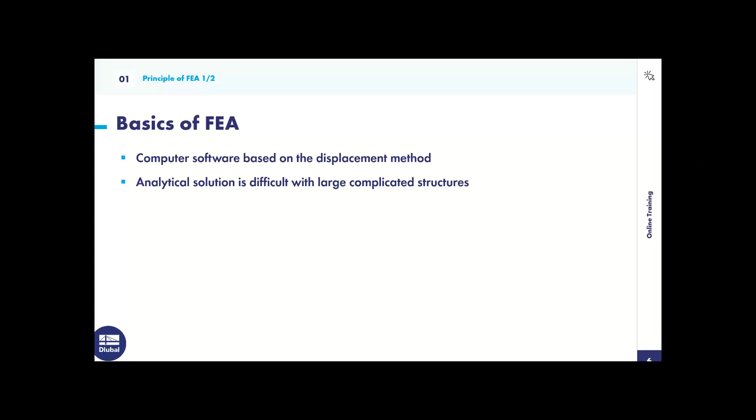So basically, an analytical solution is difficult with large, complicated structures. Doing hand calculations for large structures can almost be impossible and feel like a daunting task. The limits are being reached when it comes to that, and it's also hard to receive accurate results. So this is where an FEA comes in and is then required. The structure within an FEA is converted to a finite interconnected element mesh, and then the material and cross-section properties are given at each finite element node. Once that's done, the mechanical behavior is transferred between these elements. A word I'd like you to walk away with is discretization. This is where the structure is being submeshed into finite elements.

So now we can go through the FEA calculation workflow. First, the local element stiffness relations or properties are determined. Then the program changes the stiffness relation at each node to the global coordinate system. Then the entire structure is assembled. Fourth, the support conditions are implemented into the structure. Then the displacement vectors are determined. And lastly, the support forces and internal forces are determined.

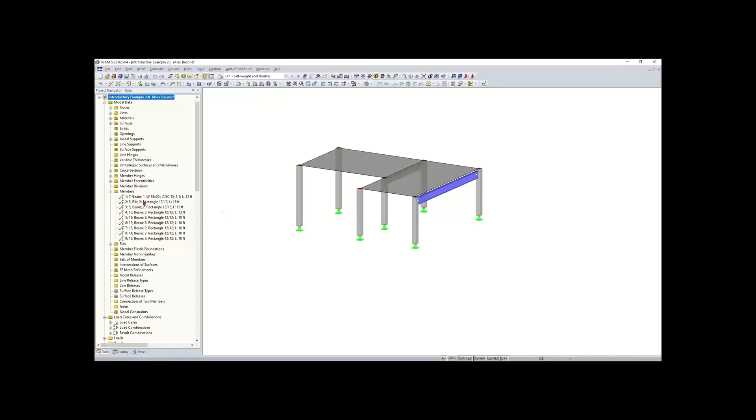For example, within this project navigator, you can expand and collapse all of these folders, such as members, and within these folders we have each member listed. This can also be done for nodes, lines, and materials, etc. And you can see when I click on any member within this expanded folder that this is synced up with your graphics window on the right-hand side here. So if you ever need to find anything, you can do it easily with that.

The next thing we have is our tables at the bottom, which mine are hidden right now. If you have either your project navigator or your tables hidden, you can show or hide those using these two buttons up here. So I can click and hide and show, and you can see that we have the tables down here. Within these tables, things can be created or deleted, and you can also just view your model information. The tables have tabs down here to organize all of your model data, as well as different tables for things like load combinations and results.

Next, if you want to change your background, you can do that by going up here to Options and Configuration Manager. So we can open that, and you can see that right now I have mine set to a standard white background, which I will use for this training. But you can also change it to a black background, and we also have a couple other options as well. After that, this is called the work window here. Within here you can draw lines, surfaces, etc. We'll be going over all of the finer details with that.

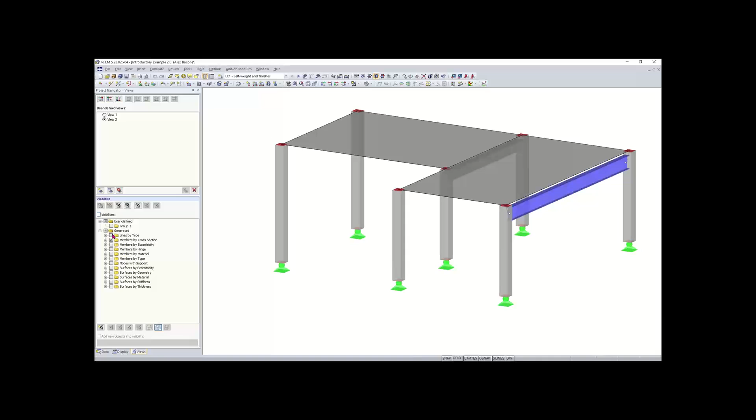The next thing, our last tab here we have is our views tab. So within our views tab, we can create visibilities based on these options down here. So if we turn on visibilities, we can create visibilities based on member cross sections. So right now, if I only wanted to show my W18x50 here, I could do that. Maybe I only want to show my rectangular columns here or rectangular cross sections, my 12 by 12s. We can do that as well. And then you can also save visibilities as well, and then pull them up whenever you'd like.

The third tab we would have is our results tab. So if I just run the results for this model quickly, then we will see our results tab, and that will pop up at the bottom here, only if we have results ran. So I just ran my load case 1, and if I turn off my visibilities, now you can see in my results tab, this is again similar to the other menus where we have our expanding and collapsing folders. So right now I have global deformations checked off, and we're viewing our resultant deformations. And you can see we get a nice look at that.

And then we can also check out our member basic internal forces, as well as our basic internal forces for our surfaces as well, if we would like. But we'll go over more of this in detail later, so don't feel too rushed to learn this real quick. We will be going over all of this in the training. But just want to give a basic overview.

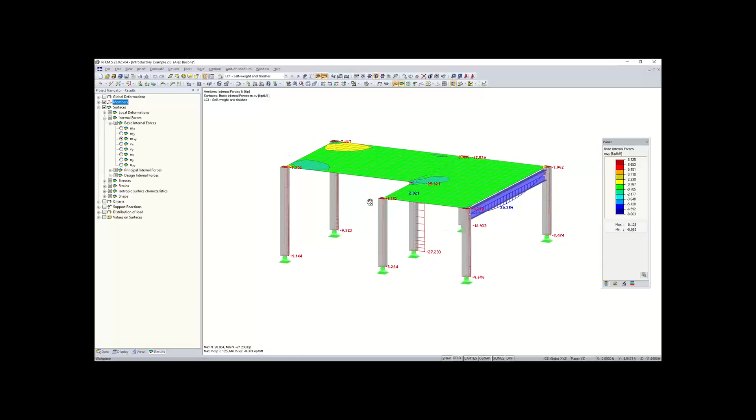Also, controls, very important. So if you like to interact with your model, if you have a scroll wheel on your mouse, you can zoom in and out with the scroll wheel. Clicking down the mouse scroll wheel will let you move the model in translation. And then holding Control and clicking down the scroll wheel at the same time will also allow you to rotate your model. If you don't have a scroll wheel on your mouse for some reason, you can use the arrow keys on your keyboard to move the model around in translation. You can also hold Control and use the arrow keys to rotate the model as well. And then if you want to zoom in and out with the keyboard, you can use the plus and minus buttons as well.

One more thing before we get into modeling, I would like to just go over highlighting. So real quick, if you highlight from right to left, this will give you a purple box, meaning that anything that touches this purple box will be highlighted and selected. Highlighting from left to right, only things that are fully engulfed into this red box will be selected. So that's the difference between the two highlighting boxes.

So now, before we go into it, I can go back to the PowerPoint. And I just have another question to ask before we get into the model. So the question is, what is RFEM? And then the options from A to C are listed. So if you could just answer that, and I will give you about 30 seconds to a minute. Oh yeah, I forgot to mention you can answer the question within the question box.

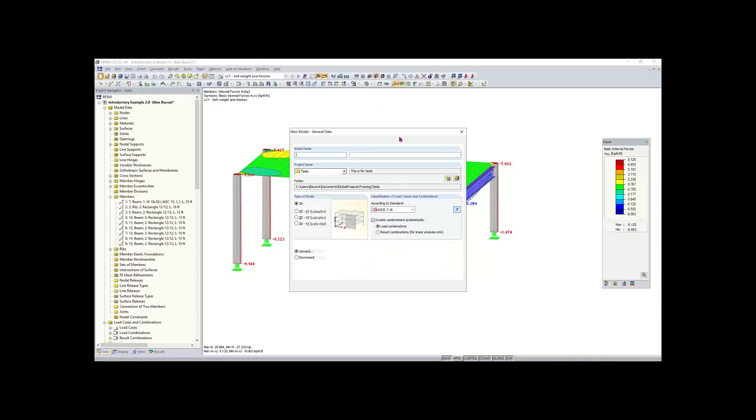Once you click that, you'll see that this new model general data dialog box will pop up. Within this box, we can enter the information needed to create our model. The model name, you can name anything you want, but I'll name mine continuous plate for this example. And I'll just put training. You can also add a description to your model if you would like.

The next thing is our project name here. We won't get into much detail with this right now, but if you have a project with a lot of models that go with it, you can create a project folder, and this will be a local folder on your computer where all the models you create will save automatically. It's a good way to stay organized. The next thing is the type of model, and right now we'll just leave this as a 3D model.

And then classification of load cases and combinations. This allows you to create load cases and combinations automatically if you have this box checked, based on any standard that we have listed here. You can see we have lots of international standards to pick from. I'll leave mine as ASCE 7-16 for this training. The next thing is the positive orientation of our global z-axis. We'll leave that as upward as default. And you always want to make sure that the local z-axis is set to downward.

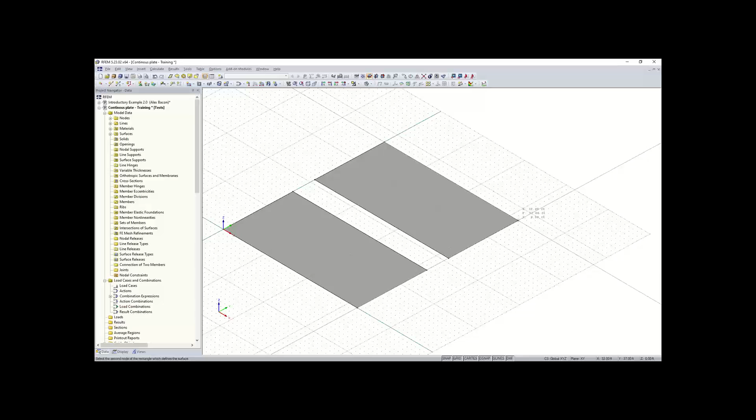And now we can create the same plate again above this original plate. I can just go up here to my rectangular surface tool again. I can click OK. And now I'm going to model a second plate 5 feet above this one. And then I can click and just drag my cursor. Make sure that this is 16 feet wide. So that will be right there. So now we have our two plates here modeled within the XY plane. We'll go over work planes later in the training.

So then we can simply create a third plate pretty easily. And to do this, we can use our move and copy tool. So I can rotate here, simply highlight the second plate, right click on it, and click move/copy. What this will allow me to do is make a copy of this plate and then move it wherever I would like using displacement vectors here. What I'm going to do is use this select 2 points option, and this will give me a displacement vector by selecting the 2 points graphically.

So now I can just simply create one copy of this plate, and then I can create a displacement vector graphically. I'll select my bottom corner here, and I would like this copy to be 5 feet above this plate. So I'll click that, and I'll click OK. And now you can see that the copy was made, and it was made based on that displacement vector that I selected.

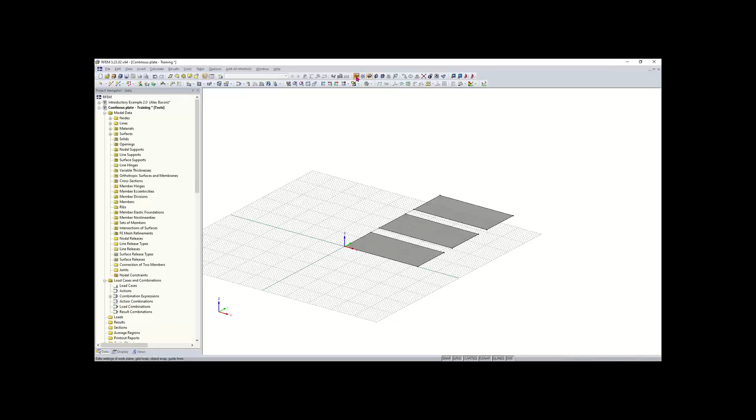And now you see we have a dialog box with a lot of options for our work plane and grid settings. The one thing we're going to focus on is the number of grid points. You can see we have a graphic here giving you an idea of what these values represent for plus and minus and 1 and 2. We have 50 grid points in our negative x, positive x, negative y and positive y directions. So you can either just change these numbers and expand your grid manually, or another good option is to check off dynamically according to size of model. When you check that off, you can click OK. And now you can see that the grid changes depending on what you modeled, which is pretty useful.

So now we want to model our continuous beam. To do that, we can simply go up here to our tool called New Single Member, and we'll click on that. Once we click on that, we have our new member dialog box here. There's a lot of information, but the one thing to focus on is to input what our cross-section is going to look like. So we can go over here to this button called Import from Cross-Section Library. We'll click on that.

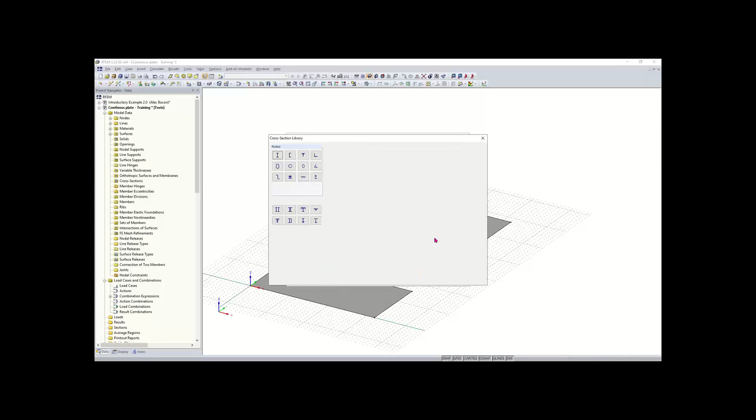This is similar to the material library, but you can see that we have our cross-sections here. We have rolled, built-up cross-sections, parametric thin-walled, parametric massive, and parametric timber cross-sections, as well as some other options down here. Right now we'll just be focusing on our rolled I-sections here.

Actually, my mistake. We will not be using the rolled I-sections. We're going to be using the rectangular parametric massive sections right here. So we'll click on that.

Once I click on that, you can see that I can enter the parameters for my cross-section, like the dimensions. So I can enter what the base is going to be, which is 40 inches, and my height is going to be 12 inches. Now you can also see down here that our material is by default set to 4,000 psi concrete.

So it's also per the older ACI standard. What I can do is click on edit, and then I can go and change it to the newest standard, change it to 4,000 psi concrete, and everything is correct there. So we'll click OK, we'll click OK again.

Now you can see that we imported that cross section. You can see it's represented here on the right hand side. So everything is good there. We can click OK.

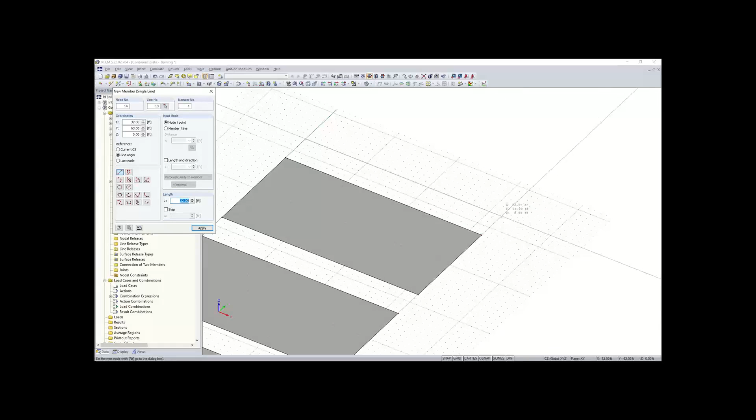So I'll left click again, and now you can see that our beam has been drawn. And now we have our 3 plates in our continuous beam right here.

So the next thing we want to do is we want to divide these lines here on the edge of our plates, so we can add a midspan here for supports. We also want to divide this continuous beam, so we can add a middle support as well.

So to divide the lines, we can simply just right-click on the line. Again, when you right-click anywhere or on any object, you get this shortcuts menu. So we can just right-click on this line to divide it, and then we want to go up here to divide line. You can see under divide line, we have multiple options for dividing a line.

So we can do it by distance. And you can see when I pick that divide line option, we have these gray arrows here on your lines, and these arrows tell you the orientation of the line or the direction that you drew the line. So this would be the start, and this would be the end of the line. You can also view these arrows by just hovering over any line that you've drawn.

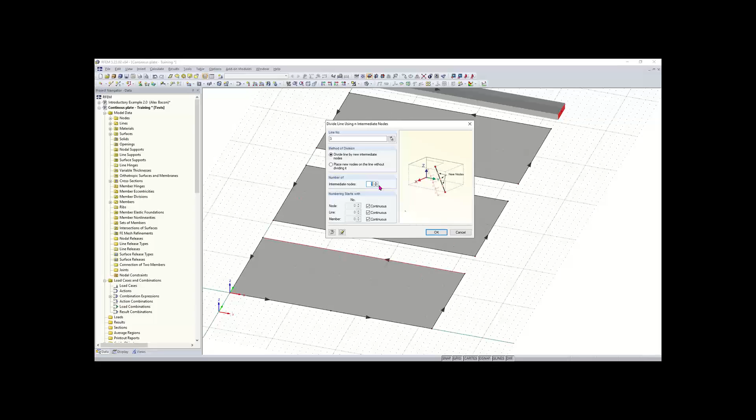So maybe you want to divide your line by intermediate nodes, which just means you can tell the program how many nodes you want to place on the line, and it'll divide that line equally depending on those nodes. So I just want to place one node. I'll click OK, and now you can see that that one node is placed and equally spaced.

So now we can do this for the rest of the lines, and we can easily just hold Control, and we can just select the rest of these lines here. Right click. Holding Control and clicking on or selecting options will allow you to select multiple options. Then we can just do this by intermediate nodes again. Everything's set here, you can see the multiple lines have been selected. I'll click OK, and now we have these nodes placed in the middle of our lines here.

Now we would just like to divide our continuous beam up here, and I can just right click. It's similar to the lines. I can just right click on the beam, go to divide member, and the third option would be graphically. So graphically just allows you to select graphically where you'd like to place the node. I'm going to place it right in the middle here at 16. And now you can see that our member here has been divided.

I'll rotate the model to get a better view. Now that our members and lines have been divided, we can draw a line down the middle of our plates. The reason we're putting this line down is to later add a line support there, so we have some mid-span support.

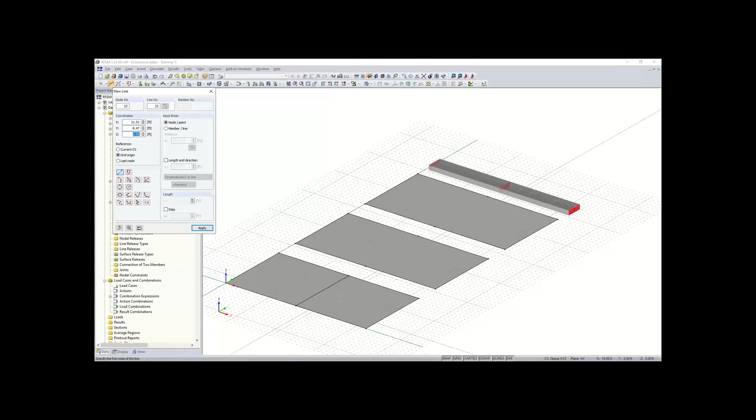We have an option called New Line, right next to the New Single Member button. I'll click that, and this box opens up where we can draw our line within the work plane. I'll select snap to, select the first node, then draw it and snap to the second node. You can see a perpendicular symbol letting me know the line is perpendicular. I can right click or hit escape to exit the tool, and now our line is drawn.

Now that this line has been placed, instead of redrawing it, we can simply click on it and hold Control. If I click on something, hold Control, and drag it, that makes a copy of it. This is a great workflow for working with anything in RFEM. You can highlight something, hold Control, make a copy, and drag it and snap it anywhere. It's pretty efficient.

Now we can add in the nodal and line supports. First we'll add line supports for our plates. To do that, we go up to New Line Support. This line support will have certain conditions, so we click the button called Create New Line Support.

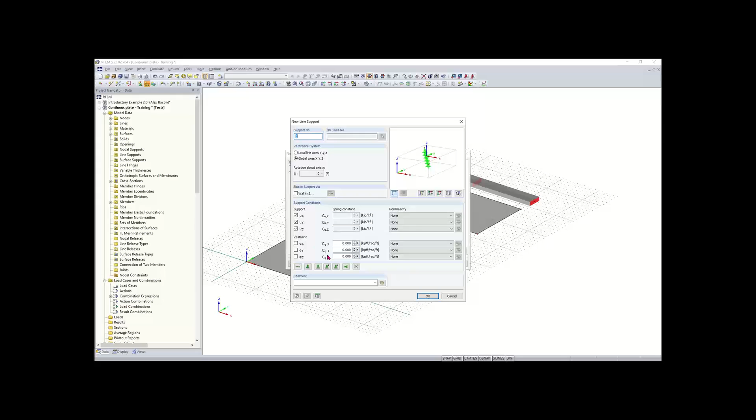We have our support conditions here. The first section is for fixing conditions in translation, or you can fix your degrees of freedom in rotation. For this example, we just want the rotation fully released, and that's all we need to do in this box. This will be a hinge support, so we click OK, then OK again.

Now I can simply click on my lines, and click on the outside to add supports to the ends. So we'll have two end supports and a mid-span support. Now our line supports have been added to our plates.

Now we just need to add nodal supports to our beam. We added line supports to our plates, now we want nodal supports. To do that, we go up to New Nodal Support. By default, hinged is already selected, so instead of creating a new type, we just hit OK. Now we can select our first end node, then select our middle support.

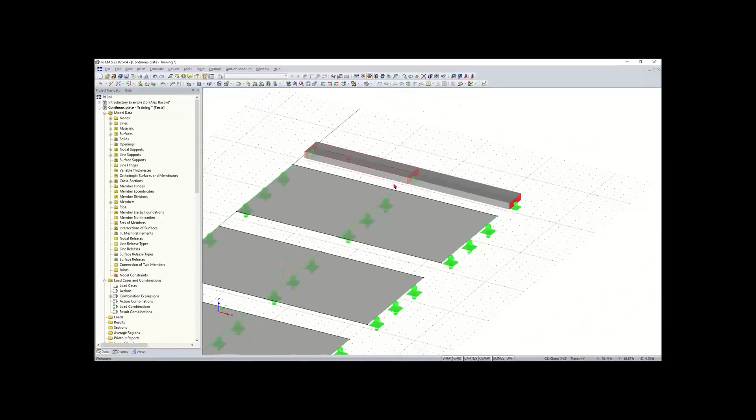This last end support will have different conditions than the other two. So we go up to nodal support and create a new type of support. This will be the same as a hinge support, but rotation about the local x-axis will be restrained. I'll click OK again, and now that support is a little different - it can't rotate about the x-axis, so it's locked. Now all of our supports are defined.

Now that our supports are defined, we can get into loading. We would like to load these plates in this continuous beam. It's important that we create a new load case, because every load in RFEM needs to be assigned to a load case. We can go to edit load cases and combinations, or use the New Load Case button, which I'll click.

The program has automatically created a new load case for me already. You can add a description here - for this one, I'll call it dead load. The action category is set to dead, but we don't need to worry about that right now. Here we have an option for activating or deactivating self-weight. For this example, I'm going to deactivate self-weight. Now our load case has been defined, and we can click OK.

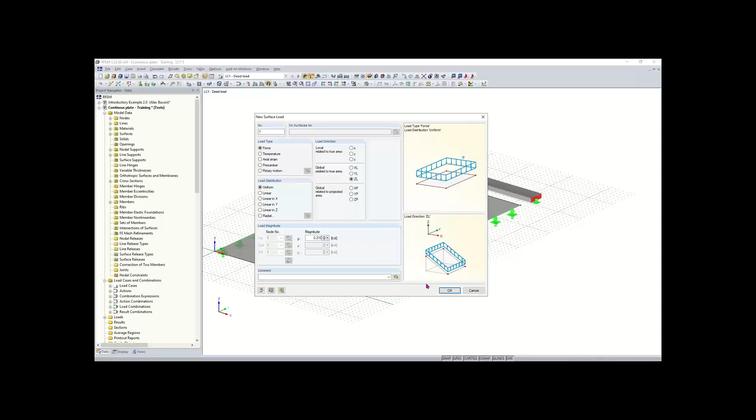Once I click OK, you can see that my cursor has changed here, allowing me to select surfaces within my model. Once I click on a surface, those loads are generated onto the surface. You can also notice that my loads are pointed up in the positive Z direction. I would like those to point down, so I can simply highlight them and double click on them, then add a negative sign in front of my magnitude. Once I click OK, you can see that the loads will be shifted, or swapped.

Next thing we want to do is add a uniform load to our continuous beam here. Again, up here with our tools, I want to choose a new member load. Keep in mind that the member load tool is for members only, and the new line load tool you want to use only for lines, when applying loads to the perimeters of surfaces, for example. So we'll choose new member load.

Again, this is similar to the surface load, where we will have a force as the load type, this load distribution will be uniform, and the load direction again will be in the global Z direction. I'm going to add in a magnitude of negative 0.21 kips per feet. I'll click OK, and now my cursor has changed, allowing me to select my two members. Now we can just right-click anywhere to exit out of that tool.

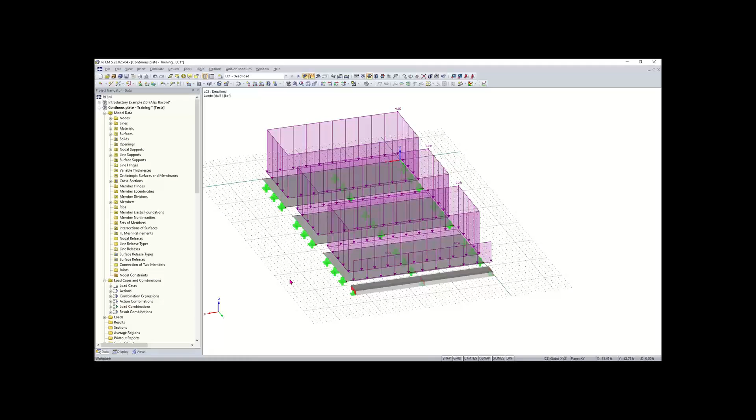Yeah, so if you've drawn your loads and you want to edit them, you can simply double click on them. Double clicking on just one will allow you to edit just that one load. Also, if you need to highlight all of your loads or a couple at a time, you can highlight them and then double click on them, and that will allow you to edit them.

Great, thanks. You're welcome.

Now that we have our loading, we can move on to creating FEM mesh refinements. Within the program, for surface elements an FEM mesh is generated, and right now our FEM mesh is set to about 1 foot for the length of our finite elements. We'll get into that more later if you're a little confused. For now, we'd just like to add an FEM mesh refinement, which allows us to change how fine our FEM mesh is for individual surfaces.

So to do this, I can simply just right-click on my surface here, go to FEM mesh refinement, and then click on New. And for this, I'm going to just create a new FEM mesh refinement here using this button called Create New FEM Mesh Refinement. You can see that surface 1 is selected, so I'll click on that.

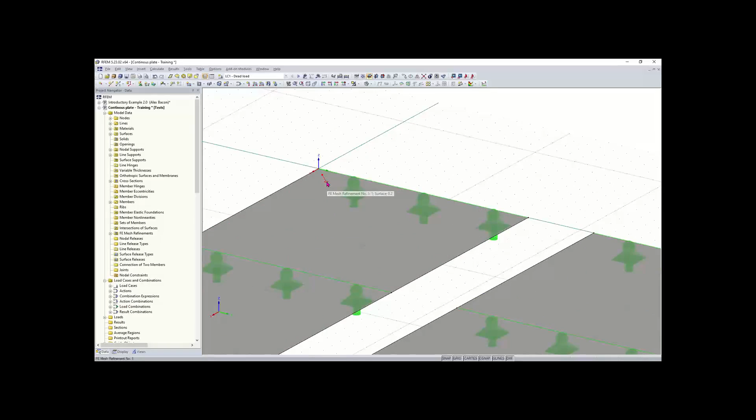And then right now we just have surface selected, which is automatically done by the program, and we can set our target FE mesh length. So I want to set mine to 0.2 feet. This is smaller than the 1 foot default that is already selected globally in the program, so I'll click OK. I'll click OK again. And now you can see that we have this little icon here telling us that an FE mesh has been applied.

Now we want to do that same thing for our other 2 surfaces here. Again, we can right click on this surface and add one, but we can also go into our project navigator here on the left hand side, and we can scroll down to FE mesh refinements. I can expand that and you can see we have one for surface 1. I can right click on FE mesh refinements and click on new FE mesh refinement.

And now I can just click on surface. It's wondering what surface I want to apply this to. I can type in the surface number, or I can select the surface graphically. I'll click OK. And for this surface, I just want to increase the FE mesh refinement just so we can get an idea and compare results later on to see how our results change depending on FE mesh length.

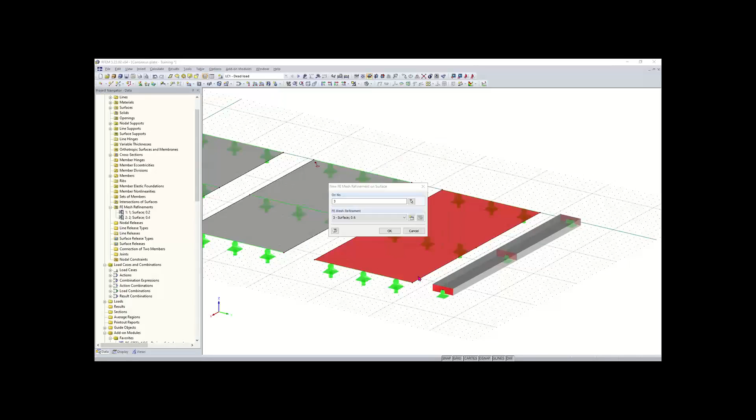So I'll click OK, and again we get that icon, and then I'm going to do the same thing for this third surface. So I'll just right click on it, and then I'll create a new FE mesh refinement, and then I'll just make this 0.6 feet. So you'll see that they'll be increasing down the line. I'll click OK again, and you can see that that icon has been placed there.

We have another quick question unrelated to the FE mesh, which maybe you can just address quickly. Okay. One of the attendees noticed that you selected concrete for one of the materials. They're wondering, what does the RF-CONCRETE add-on module do then? How is the add-on module different from RFEM is what you could quickly explain.

Okay, yeah, so basically the material for concrete has been selected within RFEM here, and you'll see later on when I run results that in RFEM you just get things like the global deformations, the internal forces, support reactions, etc. But if you want to design, let's say, rebar, you want to design your slab here for reinforcement, that's when RF-CONCRETE Members or RF-CONCRETE Surfaces would come in. So we have 2 different modules, one for surfaces and one for members. So basically the add-on module is for designing the reinforcement.

And I would just add to that, just like what Alex said, the analysis is completely within RFEM, and all materials are available to you there for full modeling for the analysis. And then, as he mentioned, the modules are for design. So within the RF-CONCRETE modules, you would find the various standards, such as the Eurocode, the ACI, the CSA standard, to actually do the reinforcement design, which is not done within RFEM. So I think that's good.

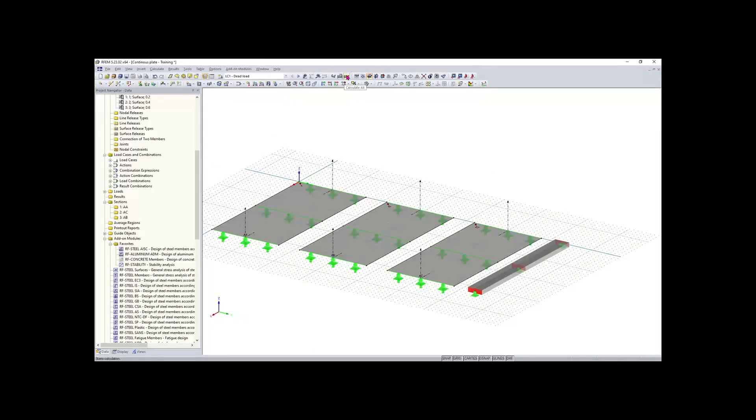So again, you can turn on and off the loading up here with this button. I don't have mine shown right now. I'll turn it off for now. And now we can go up here to our toolbar and click on this button called Calculate All. So once we hit Calculate All, the program will go through and run the calculations. It should only take about a minute. It all depends on the size of your model and the complexities.

And then once this runs, the first thing we should see is our global deformations. And then we can get an idea of our internal forces and things like support reactions. So now you can see that we have our global deformation shown right now. We get a panel over here on the right-hand side, and this panel is basically the legend for our colors here. And you can see that we have a max displacement of 0.022 inches.

And then we can also view the deformations on our member here. Right now, we just have that set to a yellow line. But if we wanted to have a colored cross-section for this deformation, we could go to Display, Results, Deformations, Members, and we could select cross-sections colored. So now we get a nice color section here.

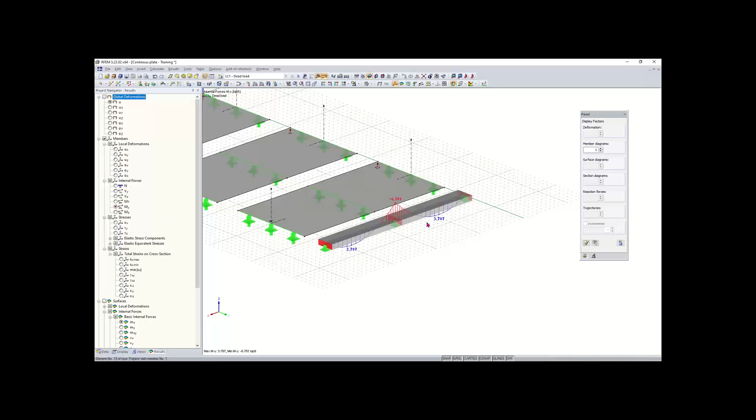We can also take a look at our member internal forces. So I can check member, and now I can look at my axial forces. Right now we don't have any. I can get a look at our moments, and we get a nice moment diagram there. And we can also take a look at the internal forces of our surfaces. So we can view the basic internal moments along the x-axis.

And again, like I said, every element has a local axis, and this is referred to with the lowercase coordinate here. So if I hover over any element, it'll give me the local axes for the plate. Also, if we want to see the local axes of our member here, we can right click on that and click on local axes, and now we will get that for all of our elements here. So I can right click again.

Quick question. One of the attendees is asking how to find the optimal mesh for the analysis. Yeah, okay. So the optimal FE mesh for analysis, it's a little tricky. There's not an actual specific length that you would pick for your FE mesh for a certain model. So basically what you can do is adjust the FE mesh by going up here to Calculate, and go to FE Mesh Settings. This is the global FE mesh settings for your model. And here we have our target length of finite elements, and you can change this.

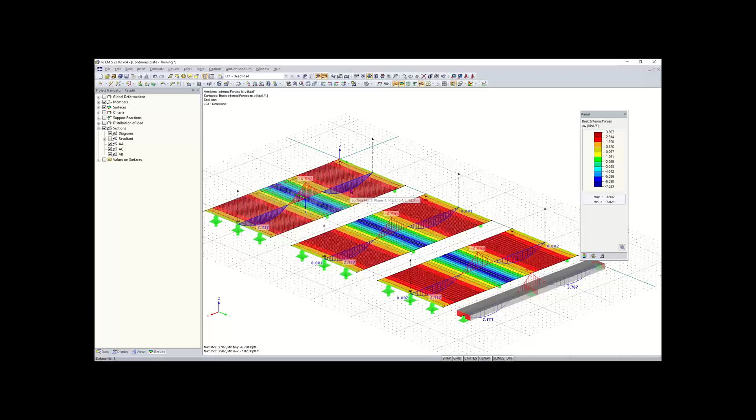So we left off with showing the results for our section cut here. And like I said before, we already talked about FE mesh a little bit, but I can explain a little bit more. The size you pick for your FE mesh affects your results. And like we mentioned, you can go to Calculate, then to the calculation parameters. Once that pops up, go to global calculation parameters. What we're going to do is deactivate the shear stiffness for our members here.

This is important if you're comparing hand calculations to the calculations in RFEM, because this option is always activated by default, and it's always making calculations based on the shear stiffness of the members. Once this is done, we click OK, and it's going to say that this action requires me to delete my results. Do I want to continue? I'll hit yes.

Now I can rotate my model again. Once I've done that, it's going to make me recalculate. Once I recalculate, you'll see that the results change just a little bit, mostly the bending moments, because instead of RFEM taking into consideration shear stiffness, it's going to assume an infinite rigid stiffness for the shear. I'll get into that in a little bit.

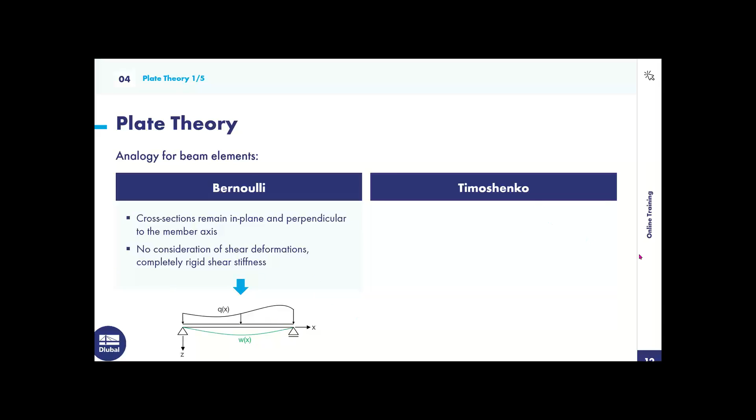When it comes to the Timoshenko theory, similar to Bernoulli's, we assume that the cross sections remain in plane and are perpendicular to the member axes. But we assume that the shear deformations are taken into consideration and shear stiffness is limited and isn't completely rigid. So this is the more realistic theory, and this is the one that you might use in school.

So these two theories we can apply to plate theories. So as an equivalent analogy for plate elements, we have the Kirchhoff theory, and then we have the Reissner-Mindlin theory. So again, the assumptions for Kirchhoff are similar to Bernoulli's theory, but for plates. And the theory similar to the Timoshenko theory is the Reissner-Mindlin.

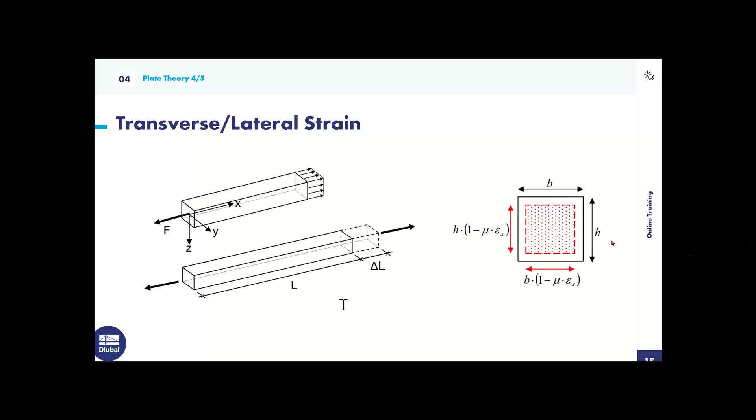And just to summarize, for the Kirchhoff theory and Reissner-Mindlin theory, Kirchhoff normally yields great results when very thin plates are used, for example, concrete slabs. You also have to keep in mind that this only considers pure bending load-bearing capacity, and this is just basically a simplified approach.

For Reissner-Mindlin theory, the considerations for shear deformations are there, and this is better for thick plates, and also where shear influence from components is relatively high. There's also a significant error when neglecting shear forces, and this is better for more accurate shear forces and is a higher value approach. In my opinion, the Reissner-Mindlin theory is what you should be using most of the time, but I think it's good to know the difference between these two theories.

So now what we can do is move back to the program. And within the program, we can go to calculation parameters. And once we open up calculation parameters, you will see that under options here, the plate bending theory is by default set to Mindlin. So this theory, like I said in the PowerPoint, takes into consideration shear deformations. So we can just keep that the same.

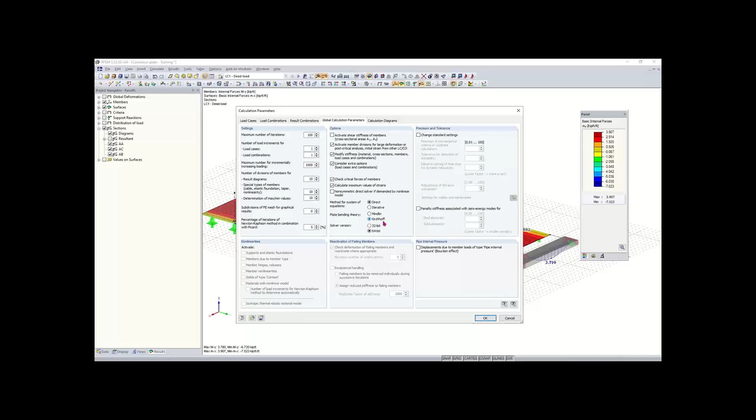Or we can also change it and get a view of how the results change. So we'll change it to Kirchhoff, and so we won't take into consideration shear deformations. And then we can click OK. But before we do that, maybe get a quick glance of what these results look like. And then we can click OK. It's going to ask me to delete the results because I changed that theory. So I'll click yes. And now I'll rerun my calculation.

It'll run the calculation based on the Kirchhoff theory. Alex, we have a quick question. Yeah. Maybe while we're waiting for this calculation to run.

Okay. We have a user that says, is it possible to change the units of the values in the results? Yeah, it is. So basically, can you change units for your results as well? Yeah, so that's something I should have mentioned in the beginning. So you can change the units of your results, and the units in general, by going up here to options. And then you can go here to units and decimal places. And then this dialog box will pop up.

And within here, you can change the units of pretty much any result. So up here you have tabs and you can go to results. And then here you have deformations. You can change the results of your internal forces here. So you have a drop down, you can change between any of these units if you like. You can also change your decimal places as well. And if you want to change between imperial and metric, you can do that at any time throughout your modeling as well.

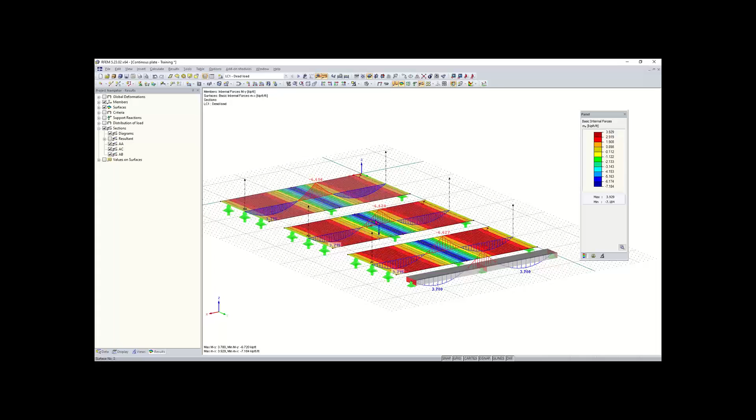And yeah, so now we can move on to the Euler case 1 example. So this concludes the plate theory and the continuous plates. So now we can move on to the Euler case 1 example frame. So what we can do is open up a new model. We can also save our model for our continuous plate by hitting the Save Model button up here. And that'll save our model.

And now I can click on New Model. And within this new model general data tab, like I said before, we can just type in our model name. So I'll name this one Euler case 1 example training. We don't have to add a description. We don't really need to generate combinations automatically. It'll also be a 3D model, and everything here is set by default, so that's good. So we'll click OK.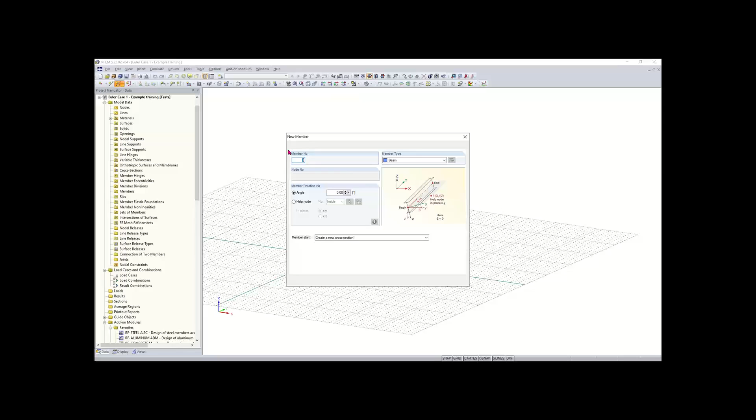And now we have our blank workspace here. So what we're going to do is just create one single member, and this is going to have a new cross section. So I can go up here to new single member. I can click on that, and now I can create my cross section here again. So I can go to import from cross section library. And then it's going to be an I section, so I'm going to click on I section.

And for this example, I will be using the manufacturer / standard group AISC. But again, we have the Canadian standard as well as Eurocode and a long list of others. But for this, I'll just be using the AISC, and I'll be using the latest standard. And then up here, I can go through W sections, and this section is going to be a 12 by 30.

So I'll click on 12 by 30, and then here we can select the material. Right now it's automatic, or by default, it's selected steel A992 based on the AISC. So that's good. We can also get our cross-section dimensions up here as well. I'll click OK, and now you'll see that our cross-section has been defined.

Also, I can take a look at my cross-section properties by clicking on this eye here, and we can get our properties here as well. I'll close out of that, and then I'll click OK. And now I can draw my member.

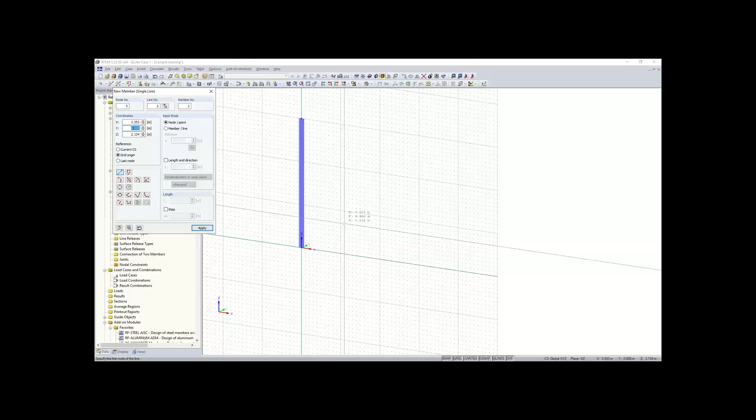I'll keep it on the XZ plane, and now I can just select my origin here by left clicking, and I want this column to be 30 feet high. So what I can do is simply go up here, left click, and now my column has been drawn. I can right click to cancel out of this, and now our column has been drawn.

So now the next thing we want to do is add in a rigid support. I can draw from left to right, highlighting this node here, go up to nodal support, and right now it's set to hinged. Instead of having to define a rigid support, I can just hit this dropdown and select rigid, and you can see that all of the degrees of freedom here from translation and rotation are all fixed with these check marks. So now I can click OK, and I can zoom in here and you can see that my rigid support has been added.

And now our Euler column 1 has been created.

And what I can do is create a new load case for it. So because I need to add in loading, I can go up here to new load case, and I can just name this load case test. The action category is just set to dead. Again, we're going to deactivate self-weight just for hand calc reasons. Normally you want to keep self-weight activated at all times for design. So we'll click OK.

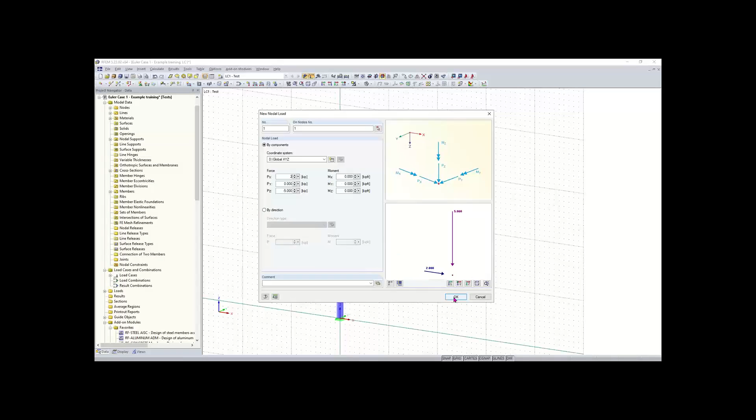And it looks like I had my node down here selected before I went into my tool up here. So what I can do is just double click on this loading and change the node. Or I cannot change the node there. So what I can do is just drag this loading to this top node here, and there we go.

So now that our loading is on the top of our column, I also want to make sure that my column is still 30 feet tall. So what I can do is go up to Tools, and I can go to Measure, Distance between 2 nodes. I can click on these 2 nodes. Yep, so it's 30 feet tall. I'll click OK.

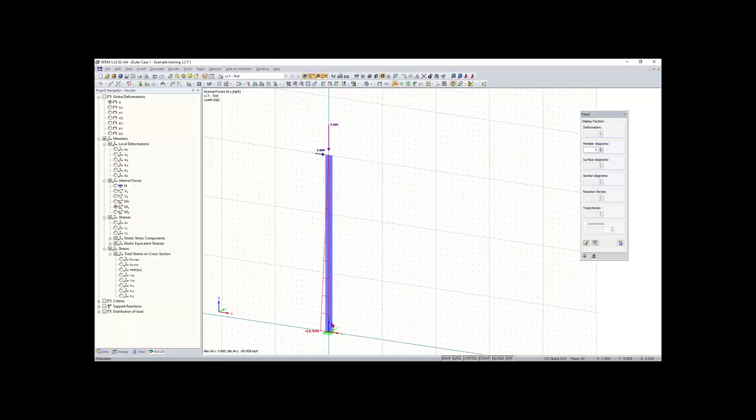And so now what I want to show you is something important. This is very important for calculations of structures within RFEM. What I can do is click on Calculate All, and I can run the calculation for this column. And now you'll see that my deformation is shown here, my resultant deformation. I can also go here to member and again show my internal forces. I can show my moment about the local y-axis here. I can get an elevation view of that.

So also when you look at our deformation in the x direction, it's 3.782 inches. Now I want to show you how this linear or first order calculation differs from a second order calculation.

So just to clarify, if I go to edit load cases and combinations, and we're looking at this load case we've just put loading on and created, if I go to calculation parameters, you can see our method of analysis right here. Generally, load cases are calculated based on a first order analysis, while load combinations are calculated based on a second order analysis.

Maybe you recognize this information from the name P-delta. The second order analysis takes into consideration large P-delta and little p-delta. So we can change our load case to a second order analysis, and then click OK after doing that.

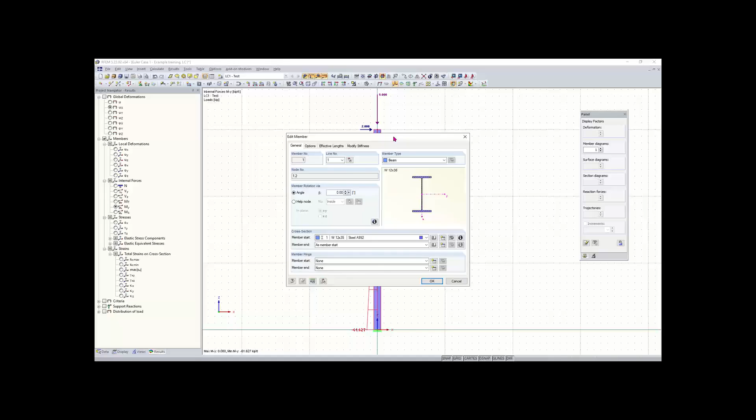Maybe just quickly we can go over member types, just the basic ones. If I double click on my member here, you can see my member type is set to beam, which accounts for beam or column. We also have rigid for infinitely rigid stiffnesses, and ribs and truss members, but we won't get into any of these today—just good to know. If you're designing a beam or column, always keep the member type as beam.

So now we can change the loads at any time. This will erase our results, but I'm going to change my loading to only 100 pounds in the axial direction. I'll double click on my loading here, change this to 100 pounds or -0.1 kips, and set my lateral forces to 0. Click OK, and now you can see the loading has changed and decreased.

Hey Alex, quick question. Yeah. I know you showed this at the beginning, but we had a question—if you could just review it again, how to automatically account for self-weight.

Okay, yeah, so I know I've been turning off self-weight throughout the training. But if you want to automatically take self-weight into consideration, I can go back into load cases and combinations, and under dead load, the action category always has self-weight activated by default. This means for this load case, a -1 factor is applied to the self-weight of the structure, taking that force into consideration. So if you have multiple load cases, you only need to keep self-weight activated for your dead load case, and that will account for it across your whole structure.

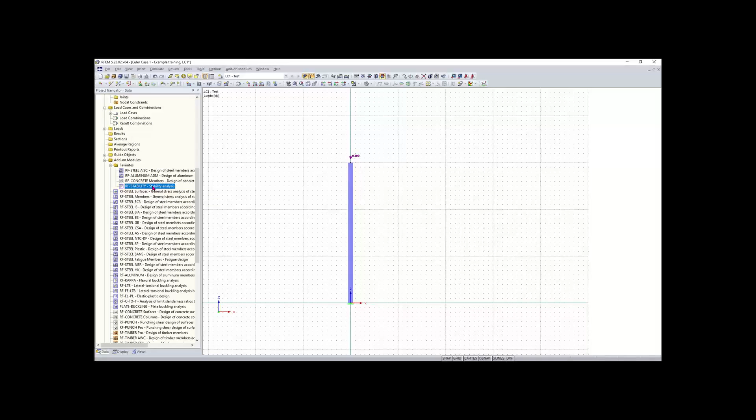If you're having trouble finding the RF Stability analysis add-on module, you can go up to add-on modules, then go to others, then go to stability, and then you can go to RF Stability.

So basically all of the add-on modules look pretty similar to this. All the add-on modules are basically just a dialog box, and within this dialog box, it'll take all of the data from RFEM, such as materials, cross-sections, members, everything. You don't have to worry about redrawing or modeling anything. It's all taken from RFEM.

And this add-on module, RF stability, is very useful. RF stability uses the help of eigenvalues and different eigenforms to perform a stability analysis. Some background: Euler was a mathematician who came up with different cases to show the critical factor along with the critical load and lengths for a structure.

This is something every stability analysis does. In order to get the different buckling cases, I will simply have to deactivate the minimum initial pre-stress for cables and members. And then it's also important that we activate the division for straight members, so I can keep that checked.

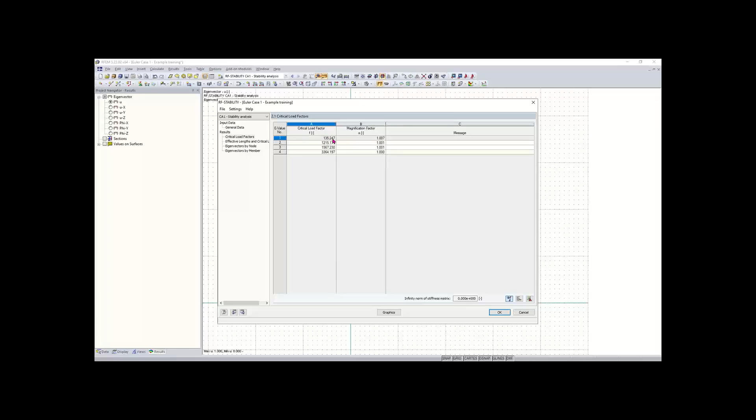Or you could look at it as a total percent of the loads your structure can take. So basically right now my structure could take 135 times more loading than it is taking right now. And then we have our effective lengths in the next results down here.

We can also view the results graphically and take a look at our eigenvectors. So I can go down here to graphics and need to hide my panel. So we have our panel here on the right-hand side, and what I can do is go through my different eigenvectors, and twist this around.

And what I can also do is go to display, select color cross sections, and yeah, so this gives you just a better idea of the deformations. And then I can cycle through those different eigenvector numbers, and that gives us a better look at the first buckling case or buckling form.

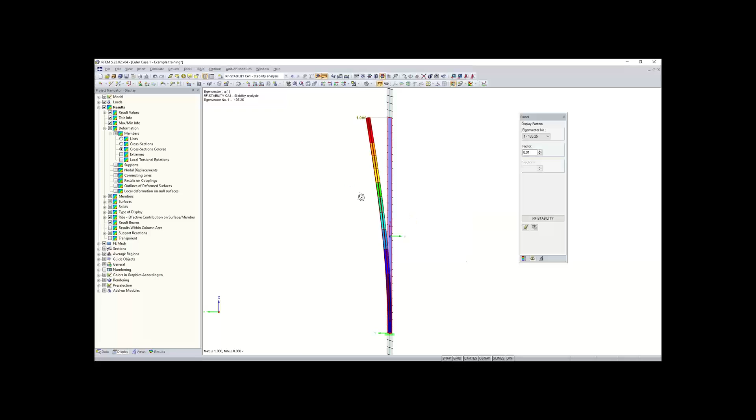I think it's clear also that the column will first be unstable in the weak axis direction. Basically the axis of this column is in the y direction, or about the local z axis. So what I can do for clarification is just turn on my local z axis. This is because the smallest moment of inertia is in the y direction, or about the local z axis.

To double check that, I can double click and go to info about the cross section, and you will see that my smallest moment of inertia here is about my z axis, 24.5 inches. That gives us an idea of our moment of inertia there, giving us our weak axis. And now we can jump back to RF stability by simply clicking on RF stability here.

And we can take a look at, again, our effective length factor here by going to effective lengths and critical loads. So we have our weak axes and strong axes for both our effective length and effective length factor.

We also can show you what it looks like if the structure is unstable. So maybe you have a structure that's unstable because the loading is too high. So for example, what I can do is click OK. And then I can go back to my LC1. So let's say my structure is unstable. I've increased my loading. It's too high. Maybe I'll make it negative 14 kips. And then I'll click OK. So now my loading's too high.

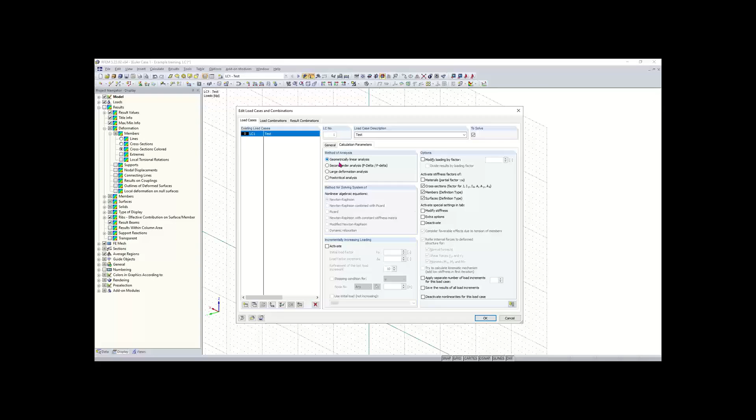So what we can do is close out of that, and the first thing you want to do is make sure that your load cases are being calculated based on a first order analysis. I want to change mine back to a linear analysis. So now that I've done that, I can jump back to RF-STABILITY. And then within RF-STABILITY, I can keep all this the same. You'll see that the load case / combination that it's referring to is LC1. I'll click calculate.

And now once that's done calculating, you should see that my critical load factor here is below 1. So basically, since my critical load factor here is below 1 at 0.966, that means that my structure can only take about 96-97% of the loading that is applied.

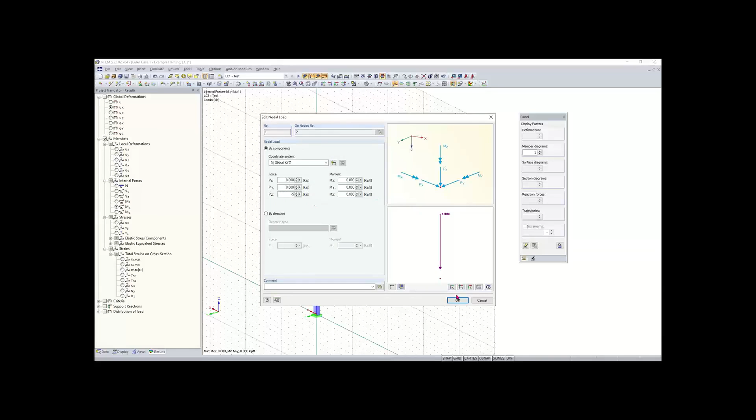And now I want to change the height of our column. So if I want to change the height of this column, I can simply highlight this node here, double click on it, and then I can change the height by easily changing the z coordinate to 10 feet. So this will be the height of our moment frame. Actually, before we do that, let's save this model. This will be our Euler case 1 model.

And then what I want to do is go to File. I want to save a copy of this model. I can save this copy as our moment frame. And then what I can do is open that copy. And now we can turn this column into our moment frame. So I can highlight again this node here, double click on it, shrink this to 10 feet.

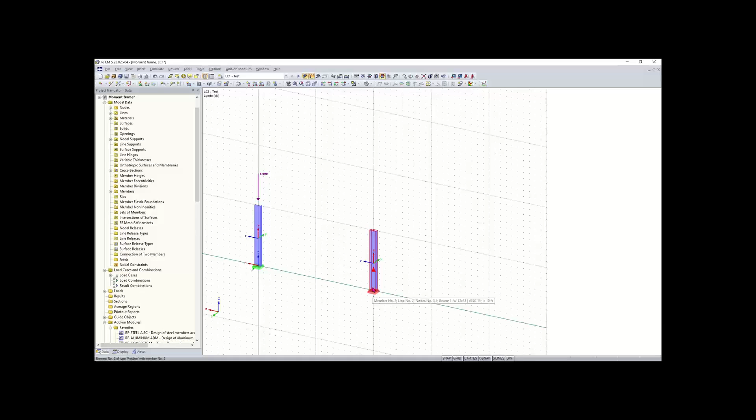And now I just want to make a copy of this column. And so I can just highlight the whole thing, hold Control, and then just simply drag this column. Want to make that 10 feet in the negative x direction, or also we can change that to, so I want to make that in the positive x direction, and it's going to be 10 feet away.

And then what we can do is create a beam spanning between our columns here. I can also just hold Control and, I can Control Z to undo that. What I can do is just hold Control and move this loading over. And now I can draw a beam that will span between the two columns.

And this beam is going to be a W8x15. So I'm going to import that from our cross-section library. I'm going to go to I sections, and then go down to 8 by 15, again leaving all these filters the same. So that'll be an 8 by 15. I'll click OK. And now we can draw our beam here.

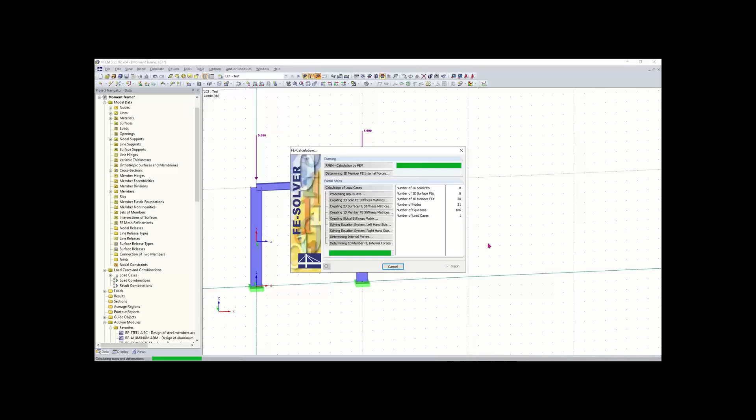And that'll span between these two columns. And I can right click and cancel out of that. And now what I can do is run my calculation. So we just turned that column into a simple moment frame. And now we can get our global deformations and see what those look like as well.

We can also take a look at our internal forces by checking off members here. So we can look at the axial forces, and then if we want to get a better idea, we can also add in some lateral forces as well. So we can add in 2 kips in the X direction for both of these, and rerun our calculation.

So now we can get a look at our moments from our lateral loading. And then we can also go down here and take a look at our support reactions. So we have our support reactions here, and we can also get a look at our moment reactions as well. And those are defined based on the double arrows here.

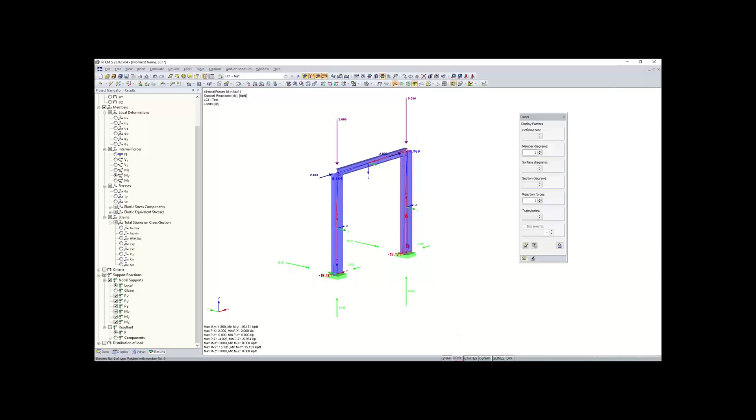Another good thing is you can turn off your grid as well if you just want a cleaner view of your results. You have these buttons down here to turn off your grid. And then what we can do is go to our stability and take a look at our critical load factors. So we can hit calculate. And we can see that our critical load factor is pretty high, which is good.

We can check out our eigenvectors. We can get an elevation view of that, and we can cycle through these. You can see we have some out of plane deformation, so maybe this frame will have some pinned lateral supports up here to keep it in plane.

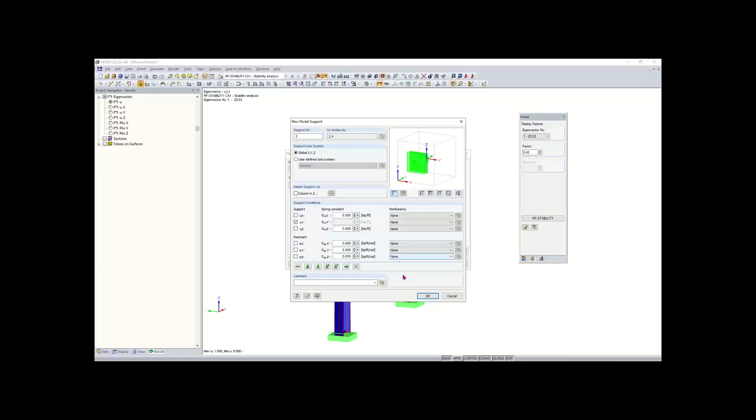So what we can do is hit new type of support. And then this support would allow it to move in the Z direction and the X direction, but keep it in plane in the Y direction. And the rotation for this pin support will be all released. We'll click OK again, and then we can hit calculate.

And RFEM will run through these calculations again, and then we can see how our eigenvectors have changed based on the supports we added here. So you can see that we don't have any out of plane deformations at the top here. And our critical load factor has increased from 20 to 164, so just adding those supports has helped a lot.

And so that's the end of the calculations and modeling for our Euler case 1 example and for our moment frame.

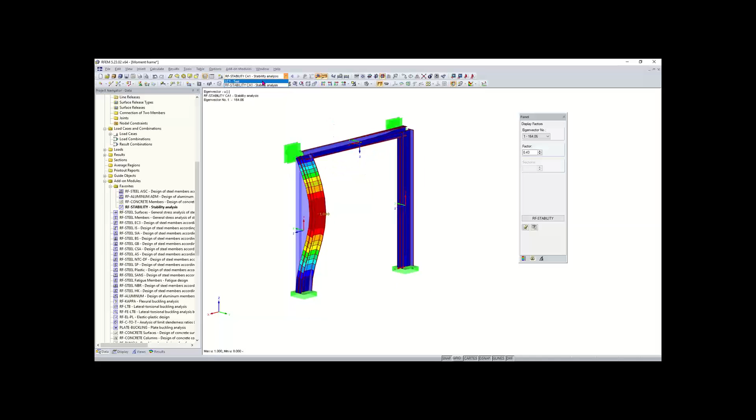So we have a quick question: how do we add lateral loads? I believe in your last example, you had applied a lateral load to your column. Do you just want me to go over how to apply those? Yeah, I'll just explain quickly that lateral loads can be applied the same way as gravity loads. Alex has been applying loads in the global X, Y, and Z directions, so lateral loads would be in the X or Y directions. You can see here 2 kips, for example, is in the lateral direction.

Yeah. When you click on new nodal load, you'll see that you have options for the X direction where you can add your lateral loading in, and then you can see how the lateral loads work with the global coordinate system up here and everything.

To specify wind and seismic loads is what he was looking for, and seismic loads can be done through our add-on module RF Dynam Pro, which Alex won't be able to get into today, but we definitely have plenty of resources online that can answer that.

Wind loads, Alex, you can show how under the tools generate loads, and then there is the option here for wind and snow loads according to Euro code primarily and the US codes. But these are really for general rectangular structures. So if you have anything outside of a rectangular structure, you'll need to manually apply it as we've been showing. So I think that should answer that question.

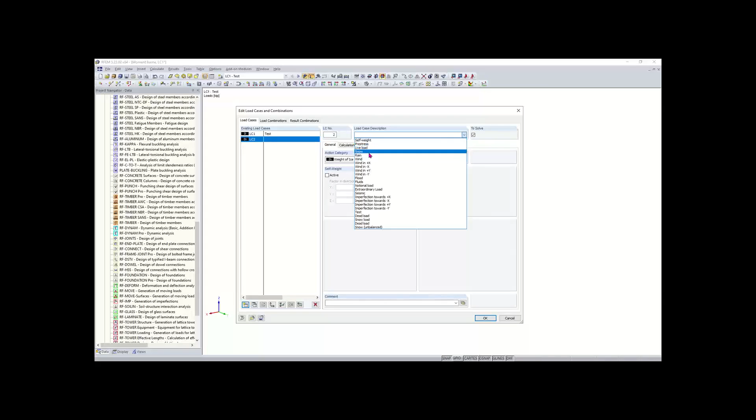Yeah. So basically, when you create, like Amy said, those are basically for pitched roof or rectangular buildings, but I guess you can also just create a new load case as well, and then just create your wind load case and just add in your lateral loads or lateral uniform loads as well.

Another quick question, going back to the beginning: when you create a new line or maybe a new member, how do you modify if you notice your dimensions are not accurate? So creating a new line, again, you can use this tool. If the dimensions are not accurate, I would interpret that as the length is not accurate. Yeah, I think just showing how to modify node coordinates or dragging and dropping, multiple options.

Okay. So right now the cursor when you click is always gonna draw the line in the grid that you have placed. This work grid, and right now mine's in the XY plane. So I'm gonna draw in the XY plane. Maybe if you click and then you just want to type in your coordinates up here, you can do that, and you can just type in the coordinates you want the end of the line to go to.

Also, you can see my length is highlighted right now as 9 feet, but if I just want to type in 10 feet and I don't move my mouse at all, I can hit enter and that'll give me my magnitude and the direction I have it pointing. So those are just a couple options when doing new lines.

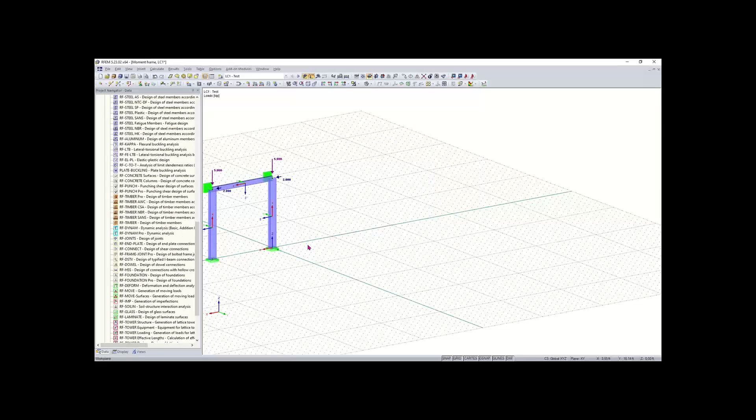Okay. I think that answers a majority of the questions for now, and we'll just continue to ask them as they come up, or I'll answer them individually. Okay, awesome. Good questions. Thanks. Thank you, Amy.

So back to the PowerPoint real quick. We'll be modeling this concrete model, and we'll just start going through this. We might not be able to finish it, but I think it goes through a lot of great methods to modeling and good tips and everything. So we'll just go back to RFEM.

And now that RFEM's up, we can simply just create a new model. What I can do is go up to the new model button. And once I click that again, we have our general data where I can just enter the name. I'll just name this one concrete model training. And for this model, we can keep everything the same.

For this one, I would want to generate combinations automatically based on the standard. And then it'll be a 3D model, and I'll just make sure that my global Z axis is facing downwards, because this is important for the add-on modules. And so now that that's all set, I can click OK. I also want to go up here and just go to File, Save All, make sure all my models are saved.

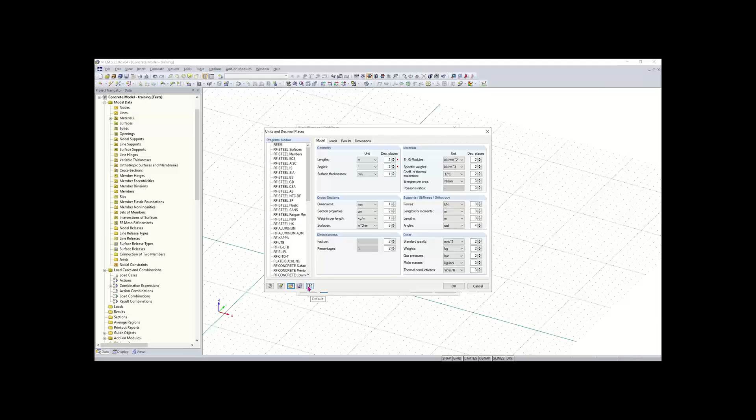Also, my grid points are still 1 foot by 1 foot. I'm not sure if I mentioned that before, but the grid points are all spaced by 1 foot. Actually, I'm in metric right now. I think I might have set my program to default to metric in the beginning, so let's change that. We'll go to load save profile again, and if you want to change the default units, I'm going to check imperial, click OK, and then this button right here sets your default, so I'm going to set my default as imperial and click OK.

And now you can see that my spacing should change to 1 foot by 1 foot. There we go. So these grid points, you can change the spacing of them. I'm going to leave them as default at 1 foot by 1 foot. And now I can begin creating my floor slab for this building.

I also want to turn off another option that we have in the program. If you right click, you can see this option that says auto connect line / members here. I'm going to turn that off. That's on by default. What that does is when you have a line intersect with another line, the program will automatically separate those lines into separate members, connect them and add a node. You'll see a better example of that when I get into creating the walls.

So I'm going to go up here to new rectangular surface, and now I have my thickness here. I'm going to make that 12 inch, or actually I'm going to keep that as 8 inches. Again, we have our materials, so I'm going to go to import material from material library, and I want to make this concrete again, and I'm just going to make it 4,000 psi concrete. I'll click OK, and I'll click OK again.

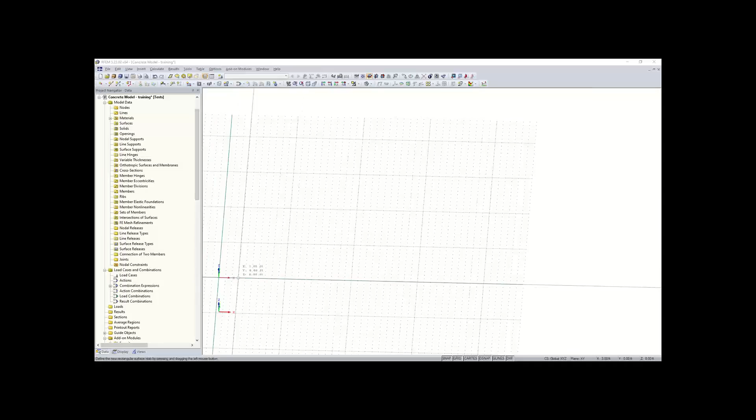Now I'll click on my origin here, and this slab is going to be 46 by 40 feet. Instead of having to rotate my model, I can just hit the top-down view here, and I'm going to hit reverse in Z direction, so I'm looking from top down. This is going to be 46 feet in the X direction and 40 feet in the Y direction. So I can move that up, 46 by 40. I can right click anywhere or hit escape, and now you can see we have our slab here.

Now that we have the slab or the floor, we can work on adding in our columns. The columns are going to be perpendicular to the slab. I think the best way to do this is to simply highlight our corner node or origin here. I'm going to make a copy of this node, so I'll go to move and copy. I'm going to make one copy of that node and move it 2 feet in the X direction and 2 feet in the Y direction. Now I can click OK, and you can see I made one copy 2 feet in the X and Y direction. That'll be the placement of our first column right there in the corner.

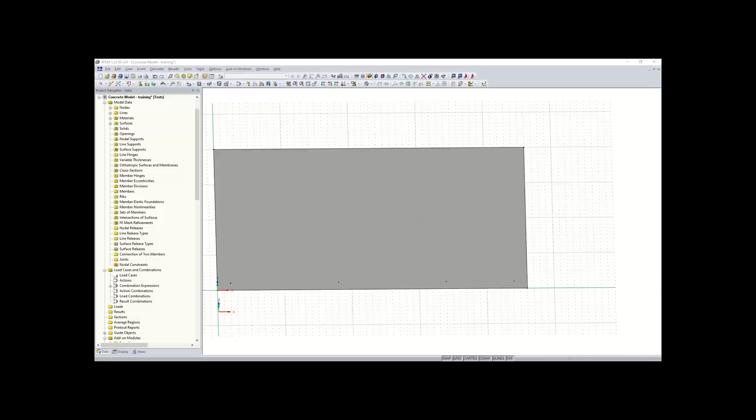And now what I'm going to have is 3 rows of columns here. So I can just rotate this model or this floor here. And then I'm going to simply just hold Control and select my nodes. And what I can do is make a copy of those. So the move and copy tool is pretty useful. So we can make 2 copies of this row of nodes and just move those 18 feet in the Y direction. I'll click OK. And now you can see that we have our additional 2 rows there.

So after that, the arrangement of column nodes is right here as follows. Something else I would like to mention is, once you have a large model and it includes a lot of different nodes and lines and elements, if you go to your display tab here, you can check off numbering and this will just give you numbers in your work window. So you can see like I have line 4 here and then different numbered nodes. So it makes it easier just to stay organized, and also for reference as well.

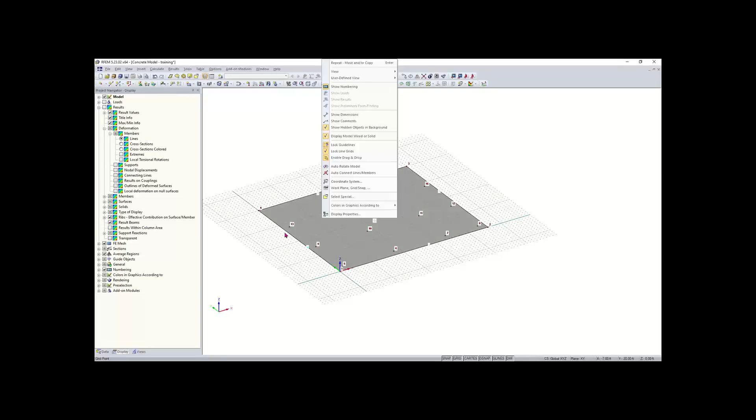So now we want to define our walls. And to do that, we can simply divide our lines here like we did with the plates earlier. So we can right click on line 4 here, and what we want to do is go to divide line and then go to graphically, and then this wall is going to be placed right next to this node here. So I'll left click and divide that line, and now you can see I'm still in the divide line tool. I can right click out of that.

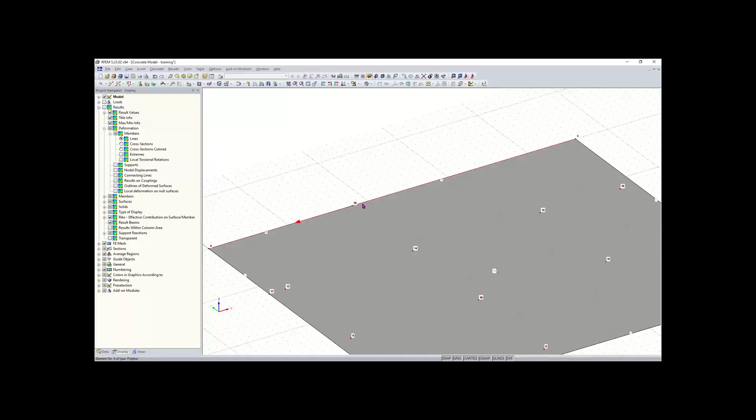And now we can do the same thing for this line up here at the top. I'm going to click on it. I'm going to right click, select divide line graphically. And just to reiterate what graphically means, you can see I can just snap or place the node wherever I want to on the line using my cursor. I'm going to place it right here. This is going to be 28 feet from the start. So I'll place that, and now you can see that we have 2 lines now with the node placed at 28 feet from the start. And also, if you're confused about the orientation of your line, when you hover over your line, this red arrow tells you the direction.

Now we can move on to creating our semicircle surface, which is going to be used for our spiral staircase over here. And we can go up here to new rectangular surface, and instead of clicking this, we can hit this drop down button here, and you can see we have a list of different shaped surfaces, along with being able to do a polygon, or you can select the boundary lines of something and create a surface as well if you don't see the shape here. And what we want is semicircle. Similar dialog box, everything here is fine, we can keep that.

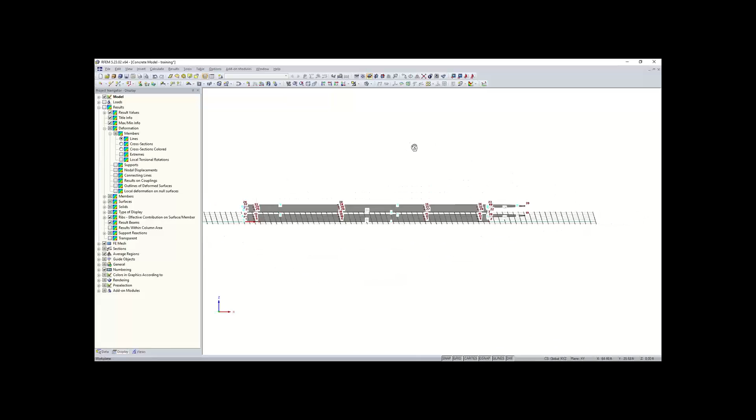We'll click OK, and now our ceiling slab is created, which is not the correct height. To change that, I can Control Z and redo the move copy. Oh, I typed in 1.83 - that makes sense, so 11.83 is what we want. Now our ceiling slab is created with the correct distance between them.

The next thing we want to do is check out some different views. If we click on isometric, we get our isometric view here. Maybe we want a different perspective, so we can check our perspective view, and then look at the reverse in the Z direction. If you didn't have perspective view on, you wouldn't be able to see that there's two slabs here. So if you turn that on, you can get a better look at elements that are lying on top of each other.

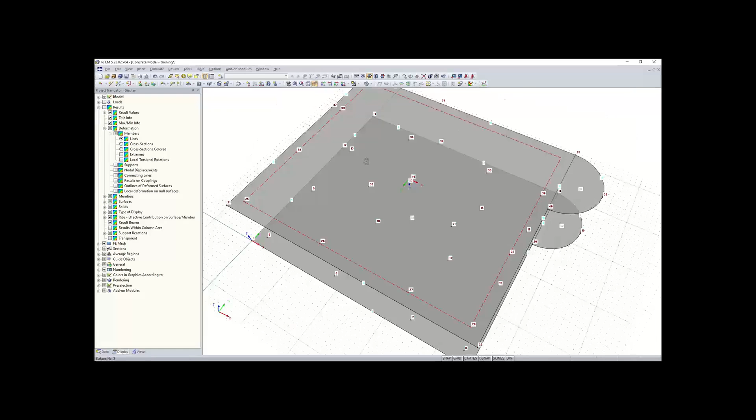Now we want to create the walls between these two slabs. To do that, we're going to first merge these two surfaces here. So what I want to do is divide this line. I'll right click on line 16 here, divide it by distance, and I want to divide it right in the middle. Now that that's divided in the middle, we have two different lines here, 16 and 17.

Now what I want to do is connect this line to this line at node 40 here - you can see that this line is one whole line. So if I go up to this tool called connect line/members, I'll click on that and highlight my node there. You can see that split that line at that node and connected them, creating two different lines and an intersection.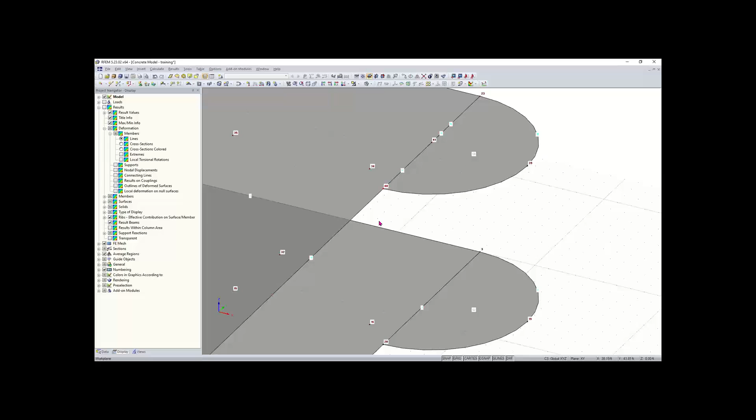Now we can delete the surface, our top surface here for our ceiling. We'll select the two surfaces by holding Control, delete. The reason I did this was so we can delete these two lines here, 16 and 17. I have two lines lying on top of each other, so I'm going to delete 16, 17, and 18, just by clicking on them and hitting delete.

We also can delete those lines by going to the project navigator, just for example. So if I wanted to delete these lines, I could go to data, then lines, then click on or hold shift and select 17, 18, or 16, 17, and 18 and hit delete. Now we're just left with this outer boundary line and node 40 here.

Now what I want to do is recreate the surface by going up to my surface tool here, hit this drop down, and select boundary lines. This is a very abnormal shape here. I want my ceiling to have a thickness of 12 inches - everything else is good here. All I need to do is select this boundary line, and the surface has been generated based on that boundary line. We also kept node 40 here, which is very important.

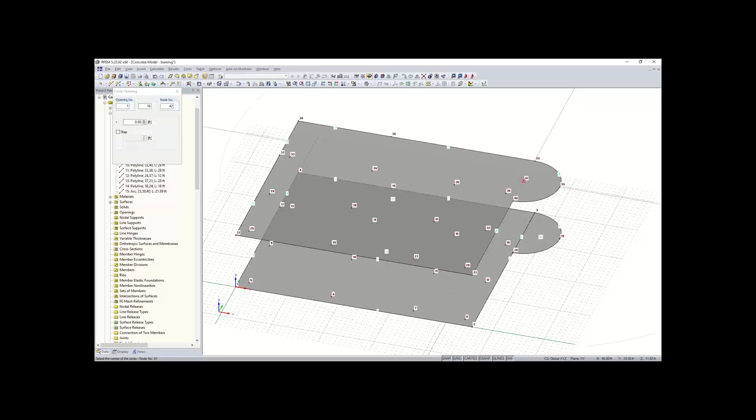Now what we want to do is add an opening right here for our spiral staircase, and we can use node 40 as the center of that opening. I'll go up here next to the surfaces tool, we have an opening tool. Right now it's set to new rectangular opening by default, but if I click on the arrow next to it, I get my options for other openings. I want a circular opening, and now I can just click on node 40 and automatically the circular opening will be set.

Right now selecting this graphically is a little bit crazy, so what I can do is go up to this window I have open, select step, and make the step just 1 foot. Now each time I move my mouse, it's just 1 foot. So then I can also type in the radius of this opening, which will be 6 feet, and hit enter. RFEM automatically integrates that opening into the surface here and gives us a nice symbol for our opening as well.

So I'll hit exit, or escape, and that tool will close out. Now we can get into defining our walls. Maybe I'll go back to an isometric view, and I can rotate the model so the staircase is in front of me.

Now what I want to do is create some new lines. I also need to create some new nodes here on this line. Actually, I don't need to create a new node there. I can just go up here to new line.

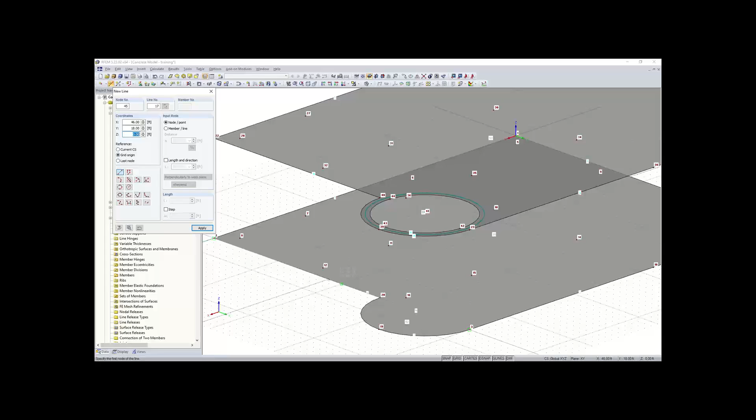Basically what I'm doing is connecting the floor to the ceiling with this line, which will act as our wall boundary. This is going to be about 7 feet away from node 20 here, so that will be at 4619. I'll draw up to the line, and you get that nice snap point for perpendicular, kind of like AutoCAD, and there you go.

Now that line's there, it's perpendicular, and now we want to create some other lines for our boundary, for our walls. The next one will be 12 feet away from node 3, so we'll go over to 3440, right here. Now I can go up to my line, get that nice perpendicular symbol. Now we have those 2 lines for our walls.

Now we can simply connect the rest - we don't have to create any more nodes here. We can just connect our nodes, 3 and 23, 20 and 40, 4 and 24. Oops, looks like I created a line there - Control Z. I can go back up to new line and just connect 4 and 24.

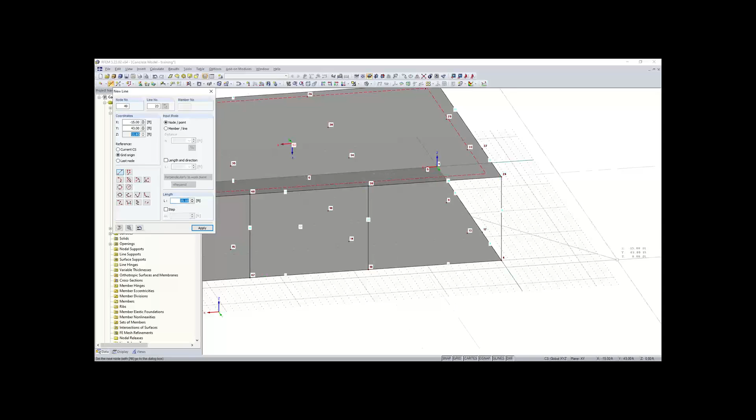And then we also want to connect 18 and 38, and also 17 and 37 here. Again, these are just creating our boundaries for our walls.

So now we have our lines here, but one last thing we want to do is connect all these lines and split these lines at their connections. We can go up here to connect lines or members, highlight the whole model, and that will split our lines at those intersections. I'll right click out of that.

Something else to note: alternatively, if you've turned off auto connect line/members in the beginning like we did, and you're drawing your line and want it to split the intersection there, you can go to detail settings and select auto connect line/members if they contact, under your line drawing. You can keep that on if you want. We can exit out of that.

Now we can create our walls. Pretty simple - we'll go up here to select boundary lines. These walls are going to have a thickness of 8 inches, and everything else here is good.

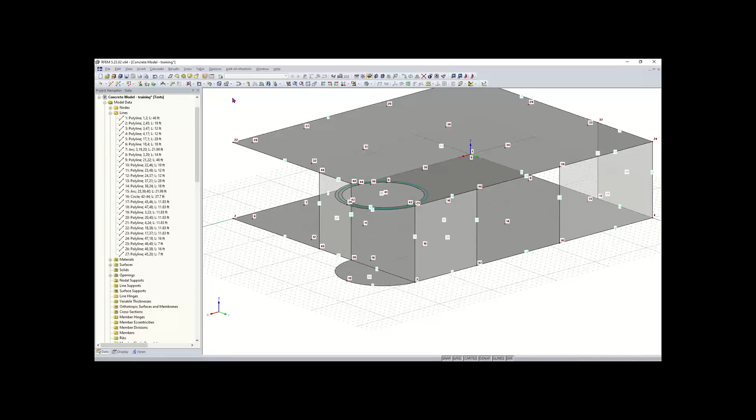Then we need to create the wall for our staircase here. Since this is out of plane, this needs to be a quadrangle. We'll go up to this tool called New Quadrangle Surface, which is going to have a thickness of 8 inches. We'll click OK, and this is basically like selecting boundary lines. So we'll select those, and now our quadrangle surface is created there.

Let's see, next we created our walls. The last wall we want to create is our inner wall here.

So I'll go up to rectangular, and now I can just create a wall here for our inner wall, and that will go up to node 34. And that did not create correctly, so let's see.

We want to go back, Control Z, and make sure our work plane is in this plane, so this would be the YZ plane. So we'll go up to YZ. Again, you have your work plane options up here to change the work plane of your grid.

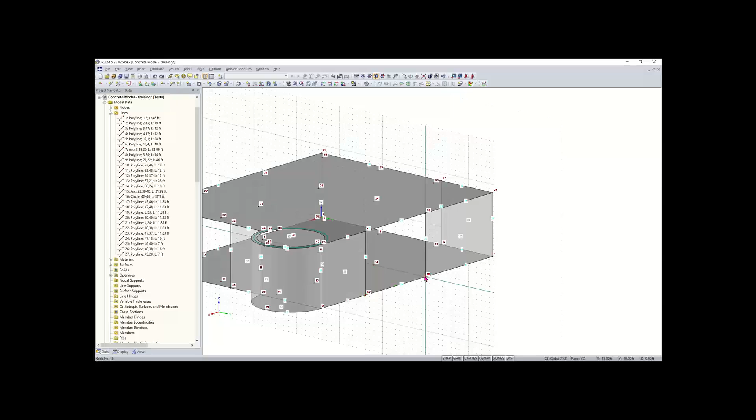What we also can do is change the origin. There's a button here called Set Origin of Grid/Work Plane. We can click on that, and then set the origin to node 18 here. And now I can draw that rectangular surface correctly.

I'll click OK, and then select node 18 and node 34, and now you can see that my wall there was created.

After that, we want to now create our columns. So I can set my work plane back to the XY plane. And then I'm just going to connect these nodes that we created in the beginning with a line.

So I'll pick node 5 and 25. And then what you can do is turn lines into members basically by double clicking on them, and then going to member—there's some tabs up here. If you go to the member tab and then available...

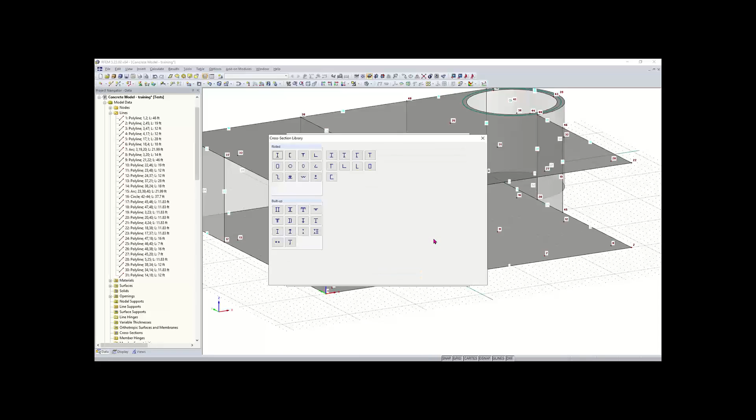Once you hit available, it's going to ask you what cross section you want this to be defined as. We'll go to import cross section library, and this is going to be a rectangular parametric concrete massive section. The dimensions of this are going to be 14 inches by 14 inches.

Our material set here at the bottom looks like it's by the Eurocode standard by default, so let's go to import material library and make this for the newer standard. We'll click OK, so we have our concrete 4000 PSI. We'll hit OK again, and then just keep hitting OK through these dialog boxes.

Now you can see that my member here, my concrete column—that line that I connected those two nodes—has been created or transferred into a column that we defined.

You can also see this in the table. So if I turn on my table up here, maybe we want to get a look at our cross sections in our table. We can open our table and go to members, and we can also go to cross sections. Under the cross sections tab here, you can see we have our cross section listed.

And we can also change this cross section from here as well if you'd like. You can also see up here what table you're in if you need to reference it—it's 1.13 cross sections. So I will close out of my table.

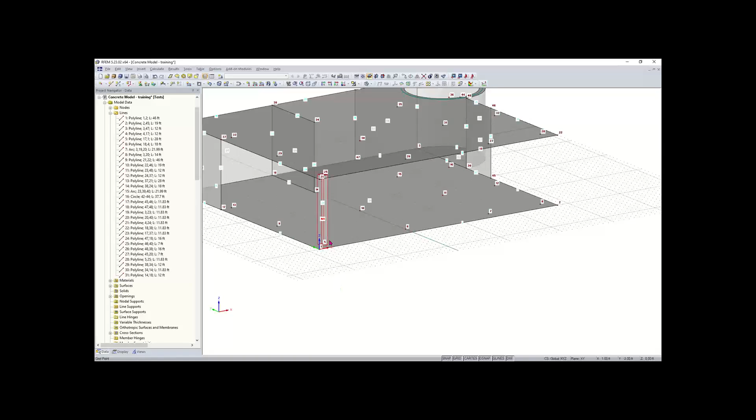Now we want to create the rest of these columns. Instead of having to manually do that, we can simply just use the tool, highlight, then hold Control, and drag. You can see that will just create a copy. Now we have our first row of columns there.

Another way of selecting columns is going up to the special select option here—it's called the special select tool. What this does is allow you to select elements within your model based on these categories here.

So let's say I want to select members. I can activate that, and I can activate all members, or select based on various options here—based on material, type, number. We want to select based on cross-section if we want to select all of our columns, and we can select based on the 14 by 14 cross-section. I'll click OK, and now you can see that all of those cross-sections have been selected.

This is handy because now I can easily just hold Control, and all those are selected, so I can just hold Control, drag, and drop, and now all of my second row of columns is created. Finally, we can just do one more column—select a random one, hold Control, and connect 15 and 35 to the floor and ceiling there.

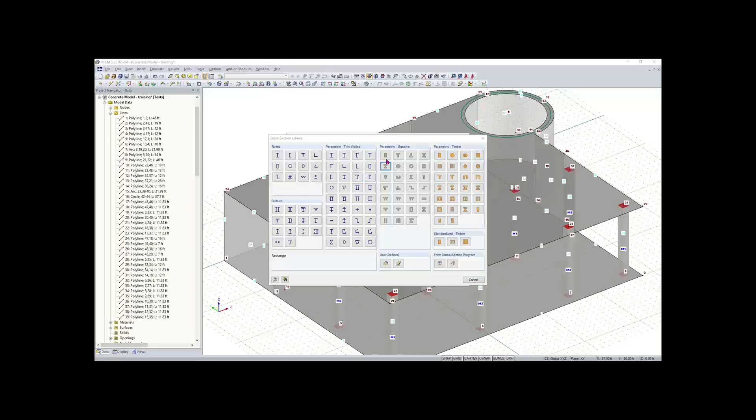And now I just need to change my cross section. And that'll load. So once I create my cross section here, it's going to be 7 by 5, parametric massive section. So it'll be 7 inches by 5 inches, 4,000 psi concrete. We can hit this drop down and choose the latest standard. We'll click OK. And again, we'll click OK. And now we can draw.

Oops. Now we can draw our rib, which is not correct there. Oh, I see. Okay, so what I can do is just exit out of that tool, go to new member, click OK. Need to redefine these. It's all good. And now it's asking me for the line. So I will have to create the line.

And I'll connect the wall to the center wall there, and then to the column. And I'll go back to my new members, click OK. And then I'll click OK again. Everything's defined here correctly. And then I'll select this line here. And now we have our downstand beam. So now that that's defined,

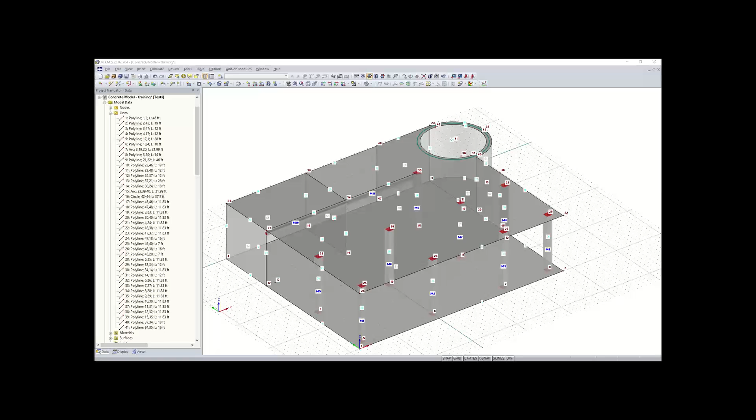the next thing we want to do is add in an opening to our back wall here. So what we can do is we can go up here to our openings, rectangular, and then before we draw this opening, we need to make sure our work plane and origin is set in the correct orientation and position. So this work plane is going to be in the XZ plane. And then the origin is going to be at the corner here. And now we can draw our rectangular opening.

And that's going to start at the top left here at 1408. The coordinates 1408. We can snap to grid points right here. And then we can just simply draw that. And that's going to end at 503 right there. And now our opening has been created, our back window there.

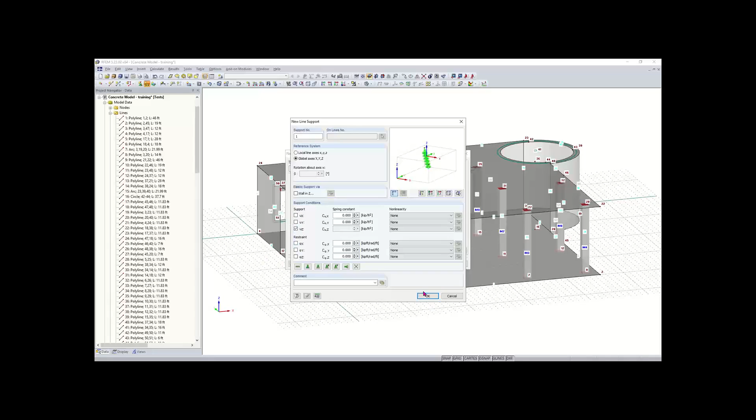And we'll go to new line support, create a new type of line support. And the only thing we want to be fixed with this line support is the translation in the Z direction. So all of these will be released. The translation in the X and Y will be released. Rotation will be released. The only thing we want is just support in the vertical direction. So we'll click OK. And again, and then I can just simply select my lines here and add in that line support.

So the next type of support we want to add is a surface support, and this will be the foundation for our floor slab for surfaces 1 and 2. So I can just select surfaces 1 and 2 and go up here to New Surface Support. And within here we can define our surface support. So we can just simply

create this foundation basically. So within the Y translation and the X translation, we're going to have a spring constant of 64 kip per cubic feet. And then in the vertical direction, we will have a spring constant of 640 kip per cubic feet.

And that's just going to represent the, well, Y and X are going to represent the shear capacities of the surface, and then the Z is going to represent the soil. So for our nonlinearity, we also want to take into account uplift. So we select failure if negative contact stress in the Z direction. And this option basically corresponds to failure under tension. And that is if the slab is lifting up, that no more support will be provided. And that's a nonlinearity that's selected there.